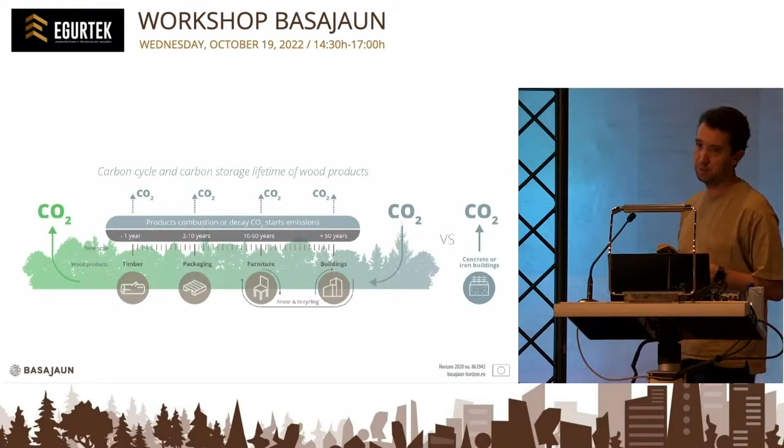And the goal was to look at the supply cycle of wood, because of the obvious benefits of wood. It's readily available in Europe, it embodies carbon. We wanted to use the supply chain of wood to include it into the building industry practice. And for that, the project is set up in a number of work packages, looking at these topics.

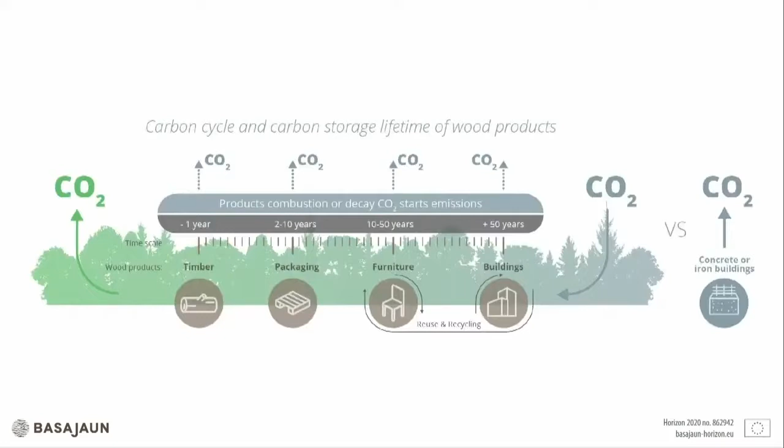First looking at how we can optimize the resources, then from forest products into sub-products, then in systems. So a system in architecture is, for example, a window with a window frame, or a partition or a roof panel, all modularized and described in our computer model, and then put together to an experimental pilot building. And the last step, I think, at the end of the process, is also the fact that you put everything together, but how can you take it apart in a smart way so you have the least possible amount of waste. So this goes back to cradle-to-cradle principles and how you can reuse materials in a smart way.

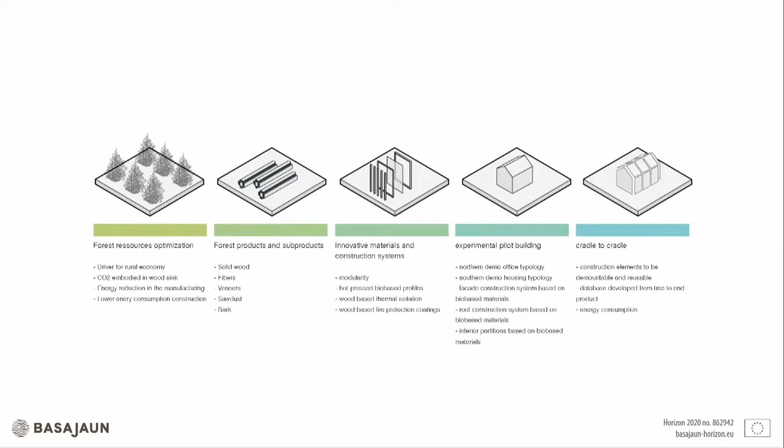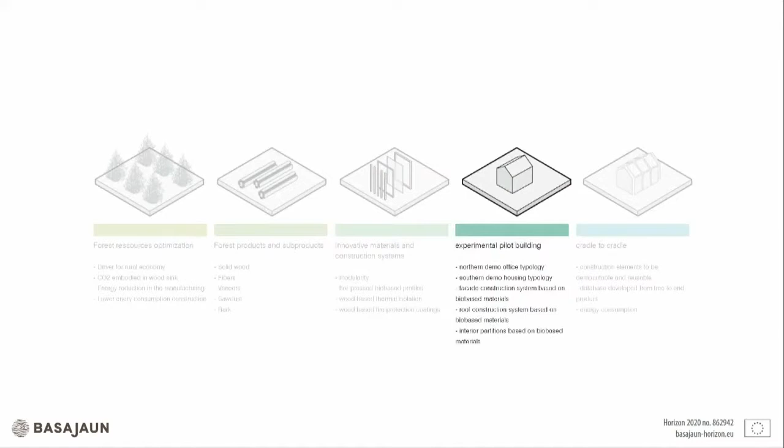For the pilot buildings, I think those are nice to see. We have two pilot buildings. For the EU, it's very important that the topic is applicable over the wider European market. So we have one pilot building all the way up in the high north in Finland, and one in the south of France, in the Gironde. Both of these buildings deal with very different cultures of building and different climates, and in a way they represent the different situations you might find in the European Union.

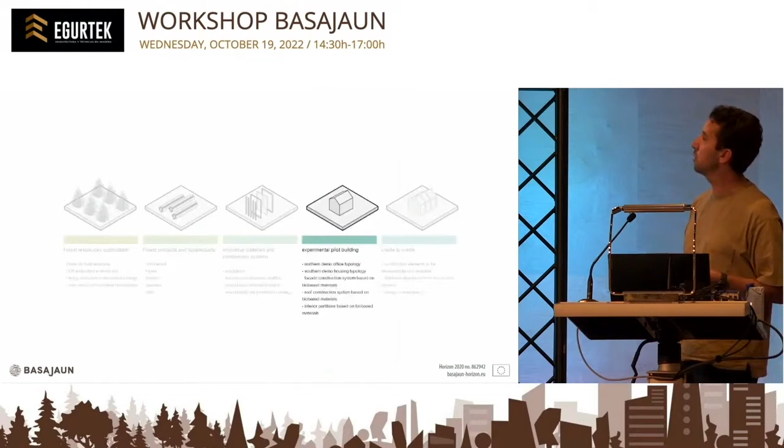So this is Jyväskylä. It's a beautiful site along a lake in the middle of Finland, and you see the extensive forest there, so this is definitely a theme. Here you see the project site, on the location of our partner VTT. The idea is that they have an office there, and the demo building we're making is intended to be a place where they can invite people, have meetings, possibly talk about this topic, but just a very friendly and open meeting place with a nice view over the lake.

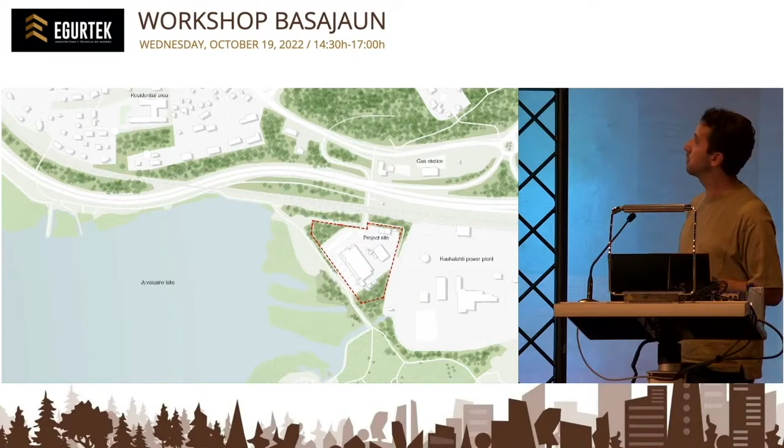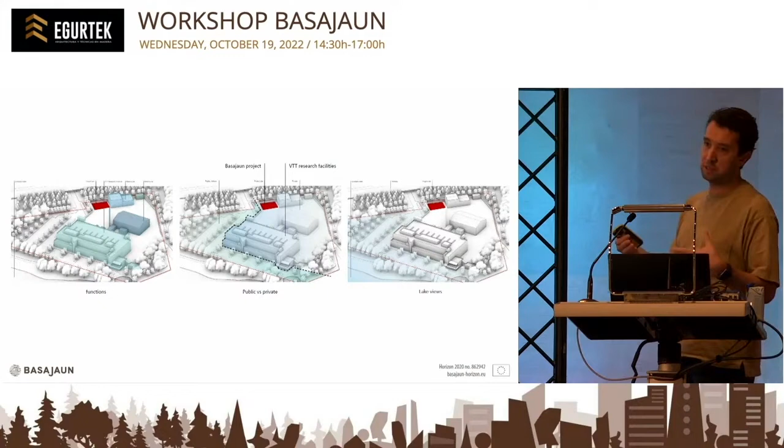We were inspired by the natural features, the woods, arriving there, and we tried to integrate it into the site. What you can see at the top is the road coming in, and in the red location that's our plot. It's the first moment you see the site, you see the building, and that's where your experience starts. There's been a whole process of back and forth, testing things, looking at the geometry. But the key thing is that we connect to the other buildings, and the meeting space in the building has a very nice large window overlooking the lake.

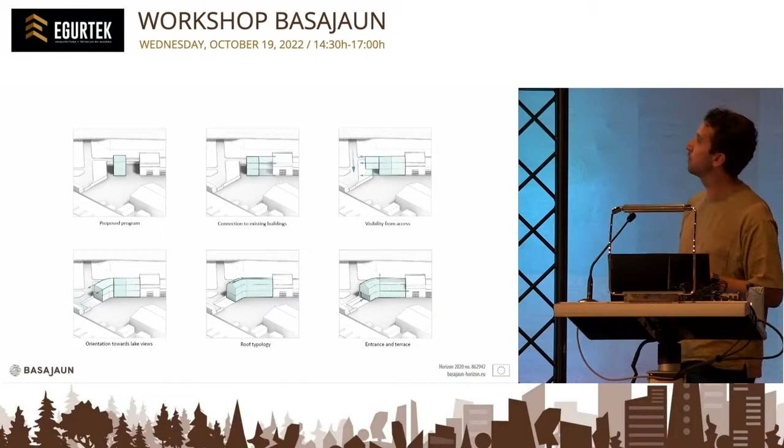So here you see an early iteration. We worked closely both with the partners and with VTT to see what the functionality of the building should be. At a very early phase, there were different manufacturers who looked at the glazing, the roof, the partitioning, and the facade.

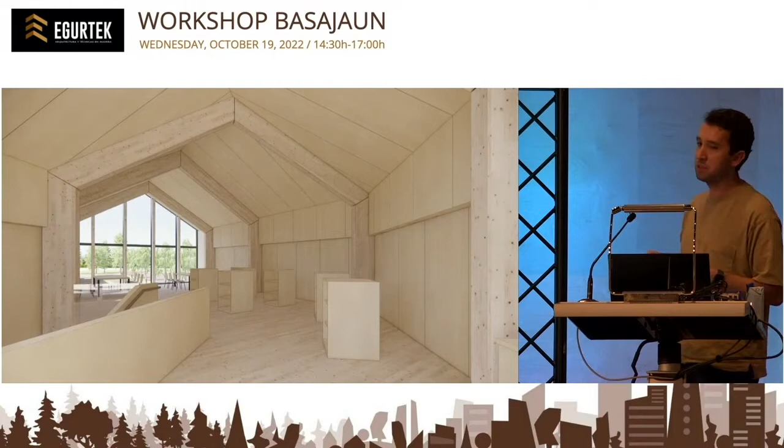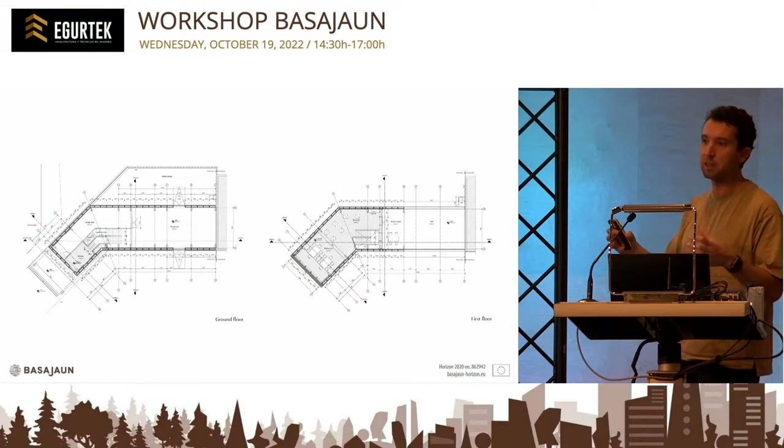Here what you see is the first design model, so it's just a sketch basically. But from the sketch, as you can see, we started to add more detail. Here you see all the interior partitioning in plywood. And here you see some of the drawings generated in our building information model, in a software called Revit, where you can organize all these different building elements and track them back into the supply chain. That's quite a conventional procedure in the building industry, but it's our intent to go from the building back into the model and then eventually to the supply chain in the forest, to really create that link within Europe. How do you use your wood?

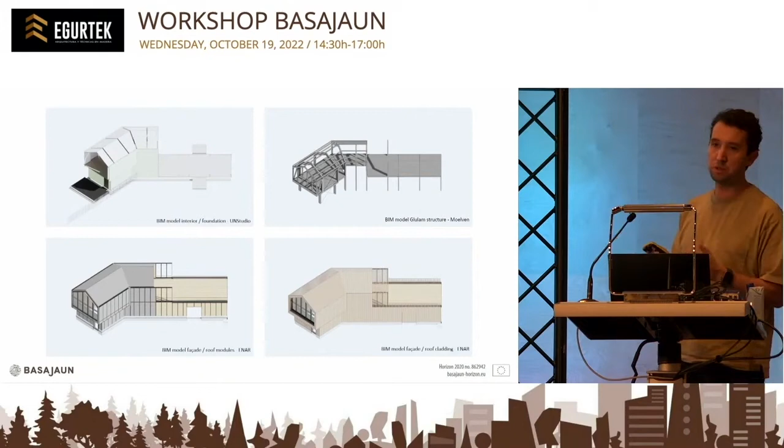Here you see submodels between the main model. A very important part is, for example, the structure. The structure is a Glulam structure produced by our partner Moelven in Sweden. They made the structural model, which is then coordinated with the facade model from a company called INAR from Madrid. This was done, of course, through meetings, but also in this digital environment, so we as a team throughout Europe could work together on this project.

Coming to the other building, this is the southern demo building. It's a residential project. There were already big plans for a school. We were not the architect of this project, of the school itself, but the architect was kind enough to let us take the residential part, the teachers' housing, for the BASAJAUN project. Together with the French architect, we worked on that project. This school is actually built out of concrete on the inside, and then on the outside it's clad with very nice wood. But for the BASAJAUN project, it was the goal to make the complete building in wood.

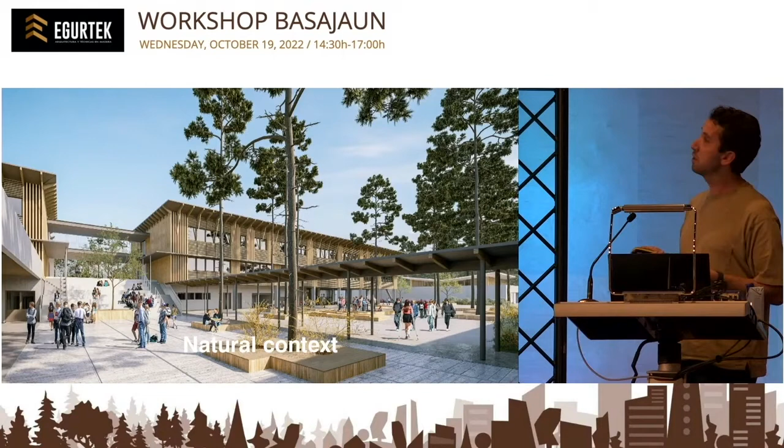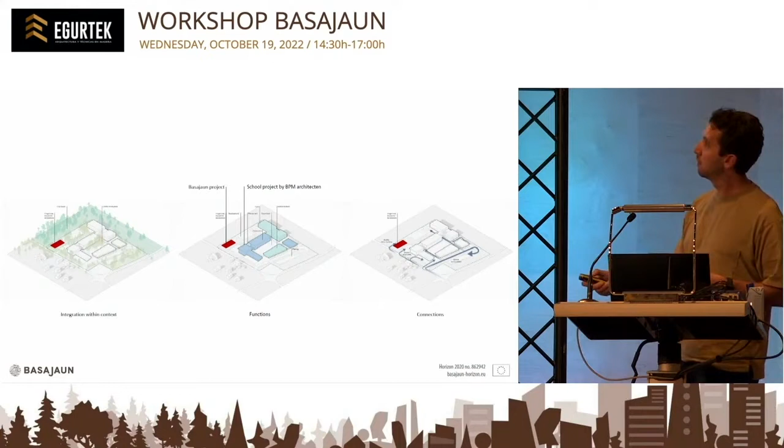Let's see. Yeah, this one works.

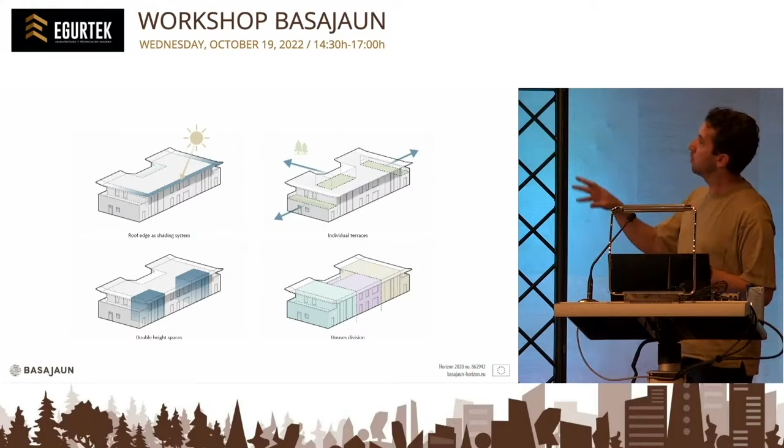Here you see a number of design exercises we did. Apart from working with wood, we also tried to apply sustainable strategies we call passive measures. We looked at the geometry of the roof to provide shading, so the building requires less cooling, and we did options on placing terraces and shaping these houses. This is how the early sketch looked like.

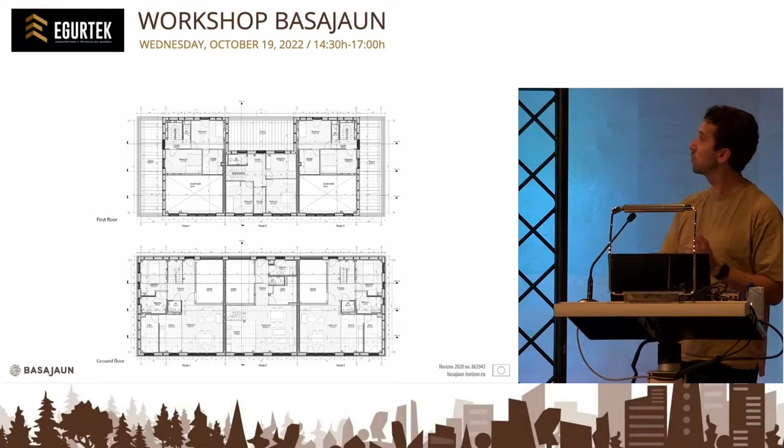It was again coordinated in the Revit model. So you see here the three houses set up with all the modular elements that we are also providing for the finished project. There's a system that you can use for both projects throughout Europe, and with that system you can make very different designs. So one is an office building and this is a housing building.

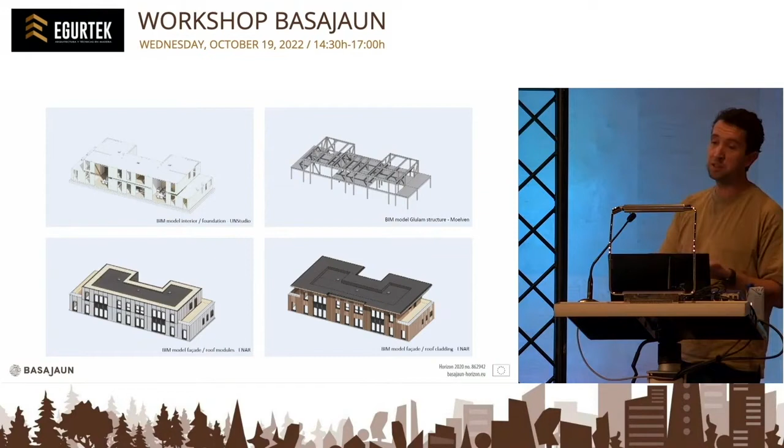You see also, looking at the submodels, that there is a similar story to how the intelligence is in the project, but with very different results. Then together with our partners, some of the systems, for example the windows, the partitions, and the roof, were also made smarter.

Here you see, based on the Finland demo, what kind of different elements you need. So you have the vision unit for the glass. It's glass with a biocomposite profile, basically sawdust with a binding element that is protruded, and you create a glass panel out of it. You also have a facade cladding, a roof, and interior partitions.

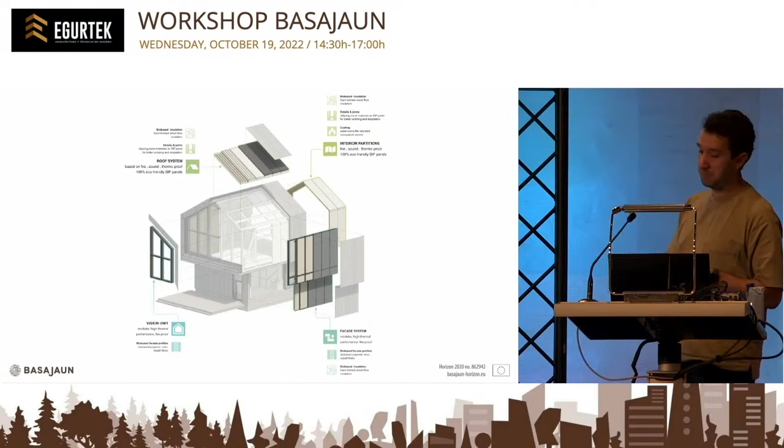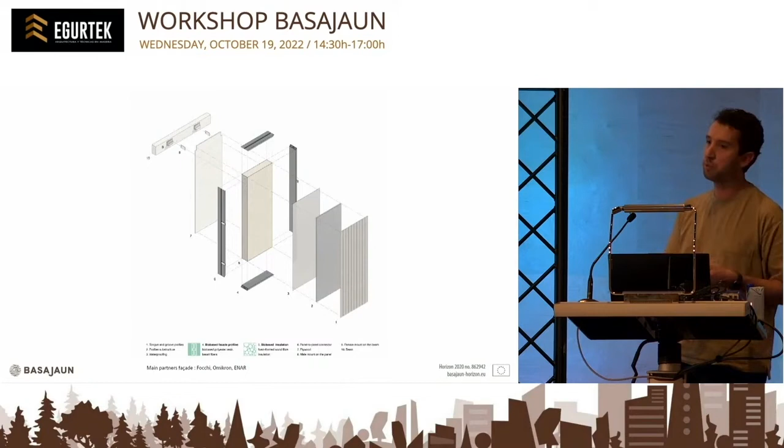And going all the way down to the technical details, like how this thing is assembled, what are the different layers, just to give insight into what is possible with this nice product.

So here you see how the window is built up. Normally you would expect either window frames in aluminium or massive wood, but here it's done in biocomposite, which is very innovative and actually quite difficult to produce still.

But it's some of the more fundamental research that we are undertaking for the EU, and hopefully we can also bring this to the market later.

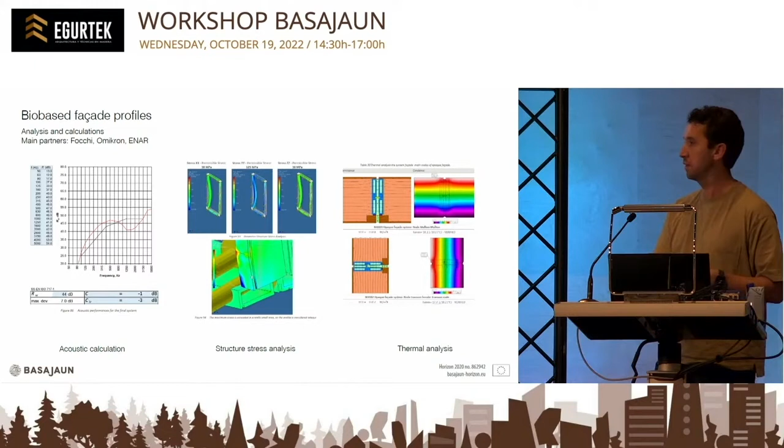All the testing needed, especially on new products. I think French regulations are very strict. There are very strict procedures that you need to go through to get approval, so you're actually allowed to build. So we did testing on fire, noise, and wind, all properly documented.

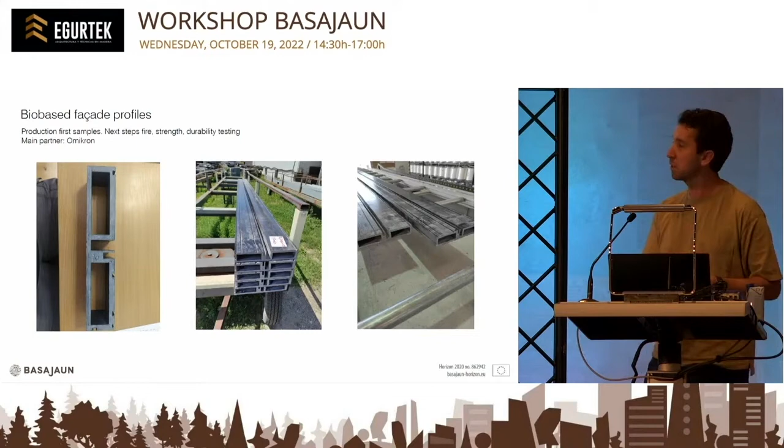Here you see some of the nice profiles. It looks a little bit like wood, but it's really based on this kind of composite, and how it's assembled in the factory.

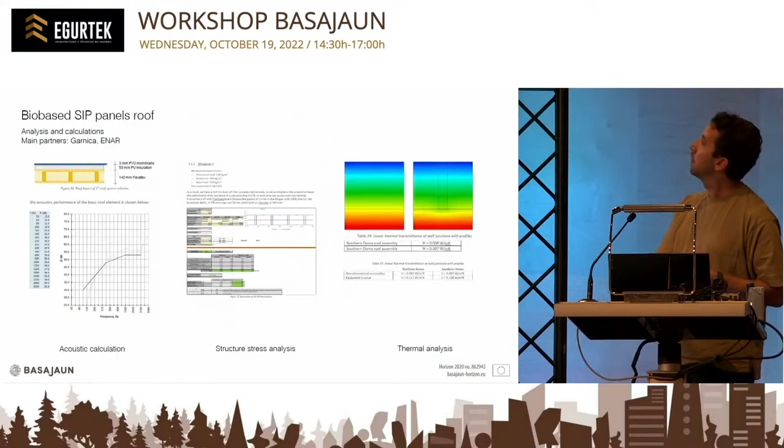Here you see the roof panels. So that's roughly where we stand now.

The partition walls, and what I just want to touch upon still, now we come to the topic of, can it be reused? Also a very interesting topic. This has to do with how you put things together, and can you dismantle it later?

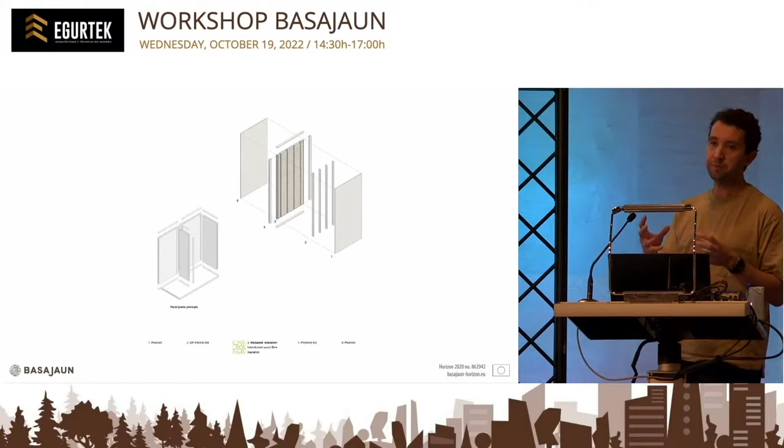You can imagine if you put a lot of glue and everything, it's very difficult to take it apart and use the separate pieces in a practical way. But also in the detailing there's a degree of smartness to enable that.

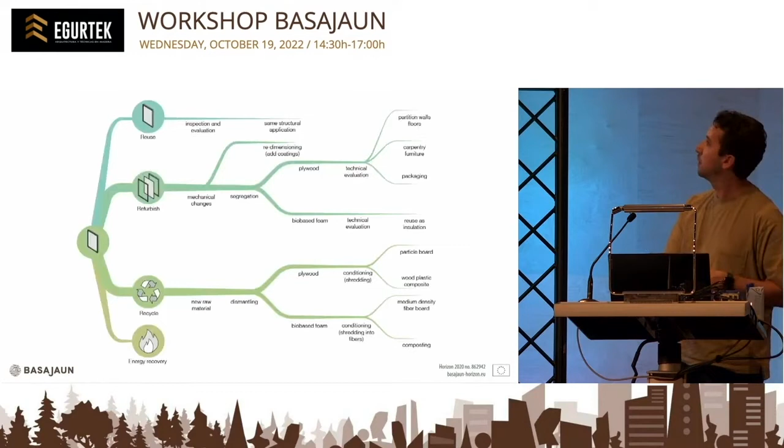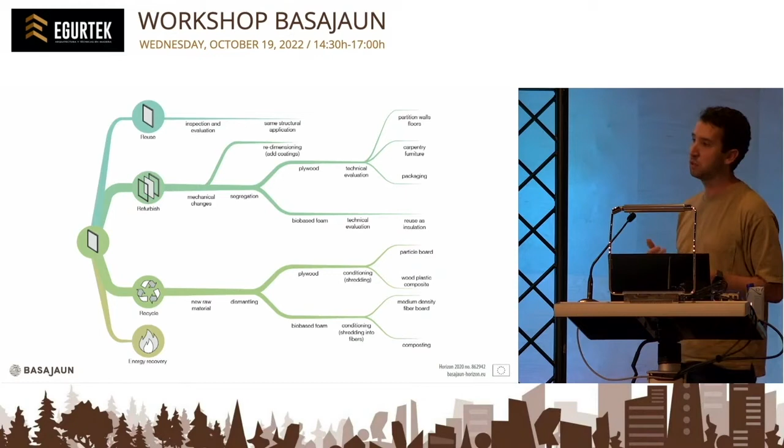As we look before at supply chains from forest into a product, into an architectural building, we could then turn it around and go from the building back to the window frame, to see what kind of future use it could have, to see if we can make this cradle to cradle in that sense. So also testing is happening on that process.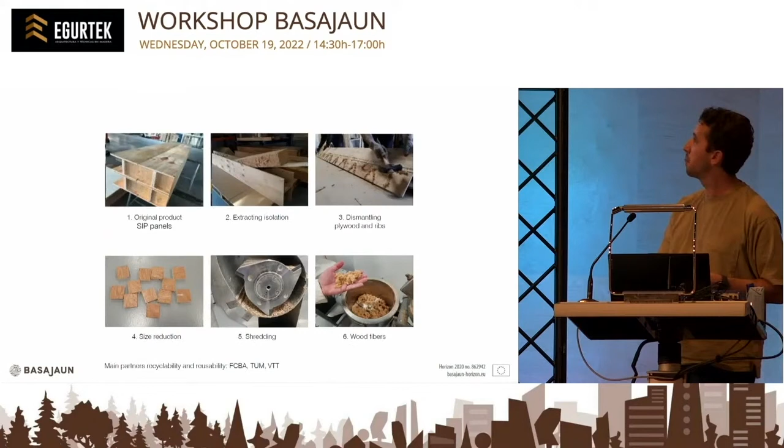So a lot of different engineering, designing, testing, a lot of fun stuff with wood. I hope I've given a nice overview based on our demo buildings.

And we'll finish with a movie just to give you a feel of what we're doing. So let me see if I can get this started.

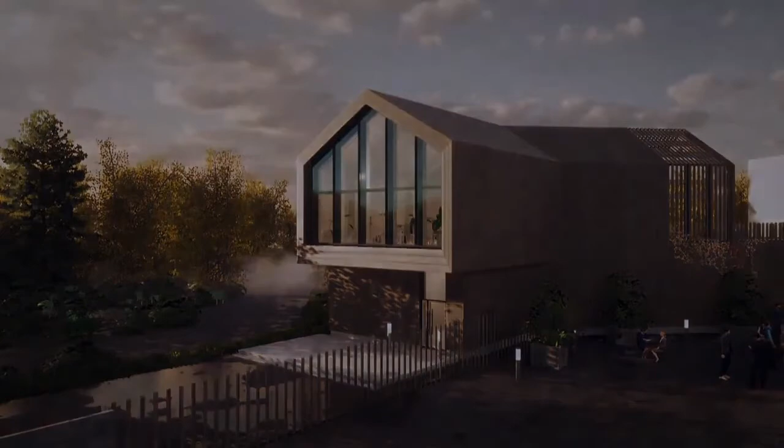Thank you. Thank you.